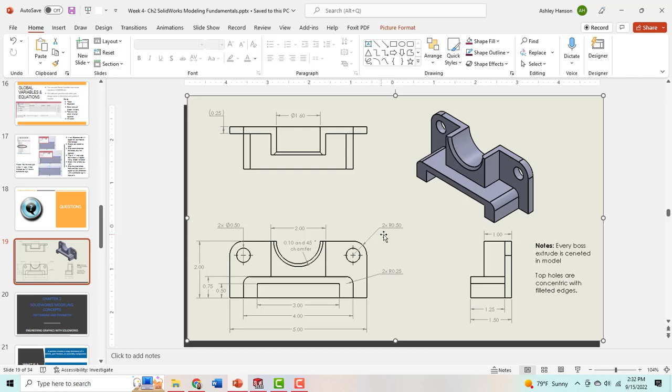Now you can see that our radius is given to us here as 2x, radius of 0.50. That's just showing that because this is a symmetric part, each of those fillets on both sides are going to have the same radius. Same with the diameter listed over here - it's just a little shorthand.

So let's get started by creating a new part file. Now this part is going to be built in inches. So the first thing we want to do is double check that bottom status bar - make sure that we are in inches, so IPS.

And we're going to create our first base feature on the front plane. So we're going to select that front plane, bring it normal to you so we can create that perpendicular sketch.

I'm just going to start with the back base feature, so it's just a basic rectangle. Make sure that when you select that rectangle icon, your first point that you're going to sketch down is attached to your origin. So click your origin and bring your rectangle out. This is giving us that attachment in space, so we are referencing our coordinate system. You can see by that lower triad down at the bottom left corner.

I'm going to use my Smart Dimension icon and dimension this bottom line segment first. The width here is 5 inches. My height is given to me in that front view as 2 inches. Now that this sketch is fully defined, I can add the feature. Make sure that your sketches are always all black and fully defined before you add in any features.

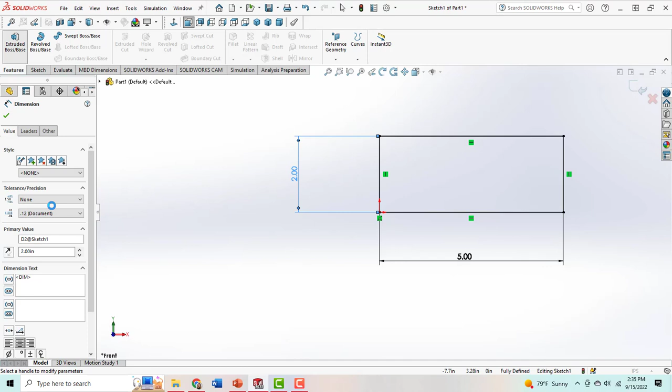So I'm going to select my Features tab, come up to my Extruded Boss/Base feature. And my depth here, because I don't care which direction we're extruding along the z-axis, since I have no other material in front or behind this model, I'm just going to leave that direction 1 as blind, and the depth is going to be 0.25. And then hit that green check mark or enter.

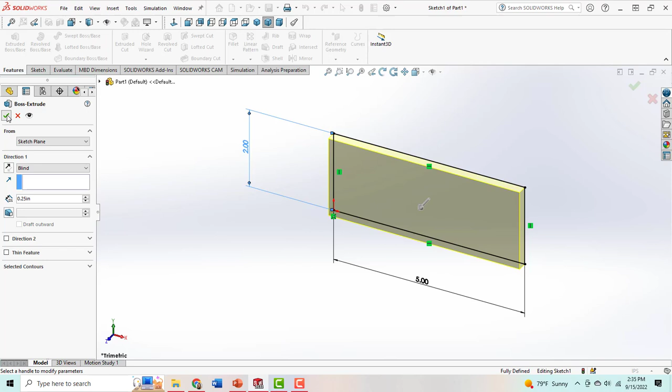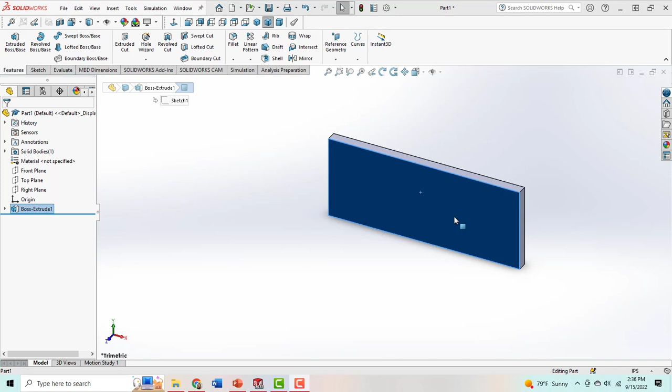Now, instead of adding in a new plane, I am just going to sketch directly on the face of this part because it is already referenced with that front plane from its original sketch. So I'm going to select the front face of this part, bring it normal to me, come up and select my Sketch tab, and again I'm going to do another rectangle.

I'm going to start with the bottom extrude. I want to make sure my first point that I click down is connected to this bottom edge of this base feature. This is just going to save me time at adding in relationships. Once you place down your rectangle, hit your Smart Dimension tool again. This bottom length is given to us as 4. The height is given to us as 0.75.

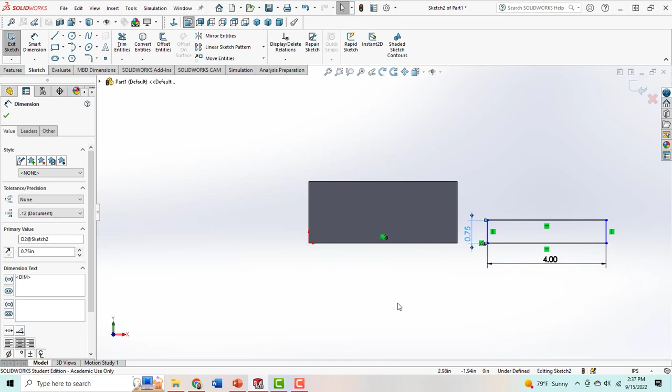Now, you can see that this sketch is not fully defined. I can't make it change size, but I can slide it on and off of my first base feature. This is because I need to give it that placement, and that is where we're going to add in a relationship.

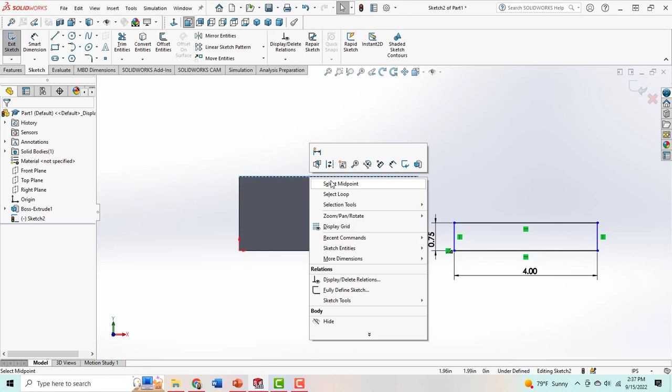So for this step, it's easier if we slide our new sketch off of our base feature, just so we can find our midpoints a little easier. To do this, you can select either the top or the bottom edge of this model, right click, and hit that select midpoint.

Then hold your control key down and hover your mouse over the top edge of your new sketch until you see that midpoint, and you'll see that little icon as a blue circle with a line through it showing you've hit the midpoint, and click it down. Now double check that your selected entities, there are only 2 points selected. If you have a line here because it selected that edge and the midpoint, just click on that line and

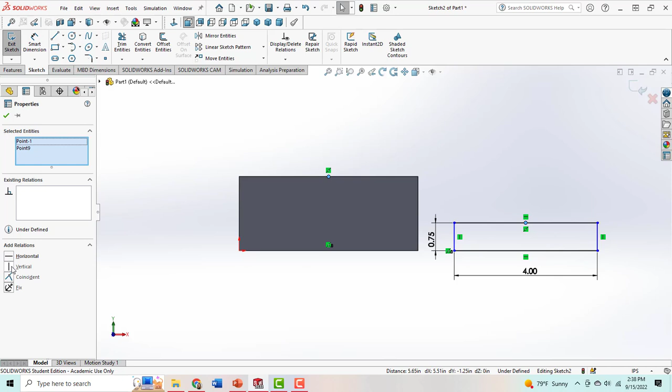hit delete. We only want the 2 points selected, and we're going to add in a vertical relationship because the note for the sketch said everything was centered. So that is just allowing us to center that part. You can see adding in that vertical relationship has now fully defined my second sketch.

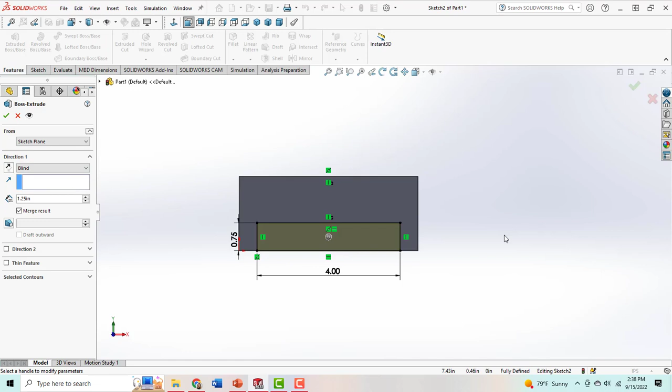So now I'm going to go to my Features tab, go to that extruded boss/base icon again, and the depth for this rectangular feature is 1.25. Now, I do care about the direction since I do want it coming forward in the positive Z axis. So I can hold the roller of my mouse down and rotate my part just to double check that I am coming out at the right direction. And hit OK.

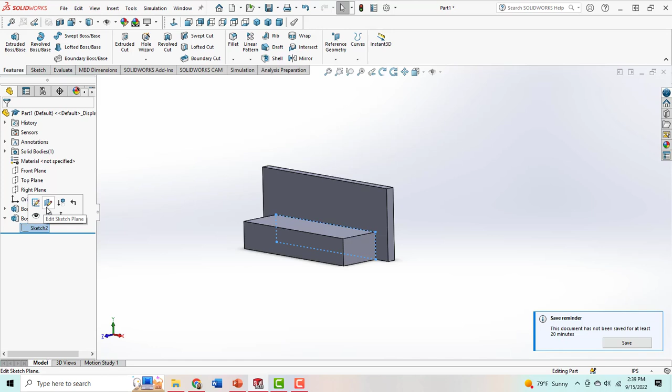Now, remember, you can hit these flyout arrows for these extrudes and edit the sketch at any time. So if for some reason I accidentally sketched on the back face, you can either reverse your extrude or change the sketch plane. By doing that, you just click on your sketch. Instead of Edit Sketch like we're used to seeing, you select Edit Sketch Plane. Here, you can now click that front face again or any plane you want and change where that sketch is located. I'm just going to leave it since it's coming out in the right direction.

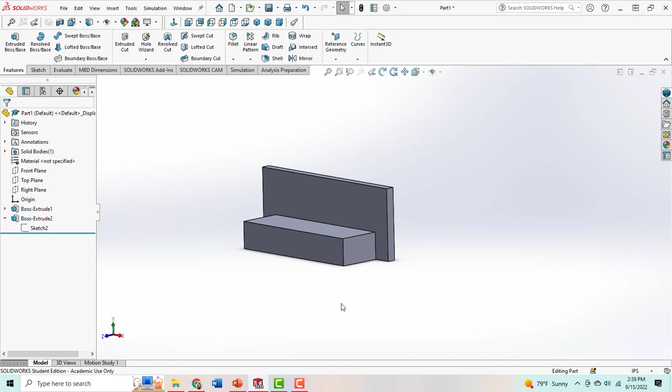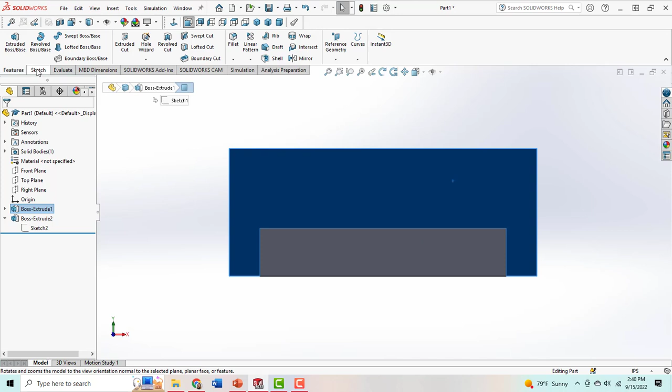So I'm going to create my third boss extrude before I go and create any cuts. So once again, I want to select that front face because that's where I am going to create the first sketch for my third boss extrude. Remember, you can select the face or a plane before you create your sketch. Bring it normal to you. Then go to your Sketch tab. Go ahead and open up that rectangle sketch again.

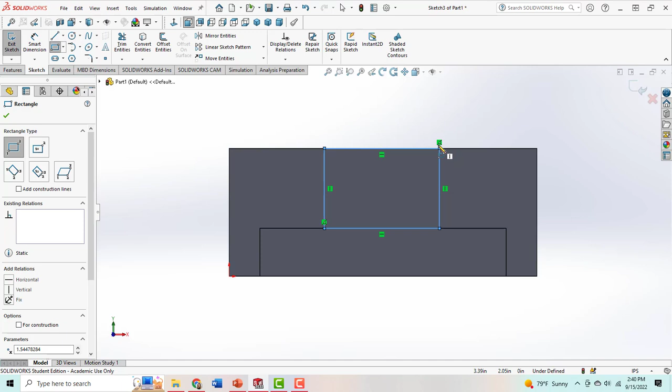Now, to save myself time, I want to make sure that I am connected to my second boss feature. So my first point down is going to be on that top edge of that second extrude. And then I'm just going to bring it up to the top edge of my base feature, that first extrude, to place it down. You can see as I did that this automatic relationship of coincident popped up on that top edge, meaning I'm connected to the top edge, as well as the bottom edge. This just allows me to not have to put in those relationships.

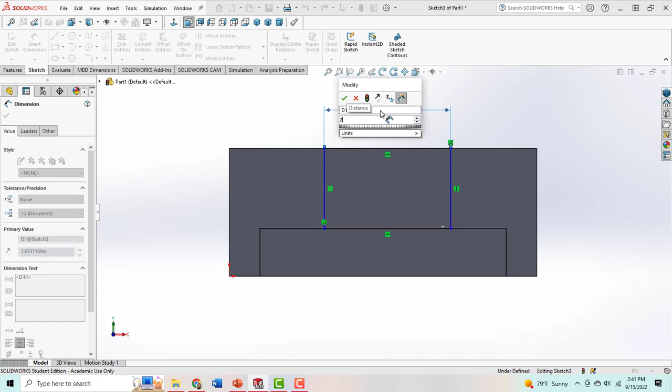It also allows me to not have to dimension the height because it's called out. Our height can only be between these 2 points. Without a dimension, it can get wider, but it can never get taller. I'm going to go up to my Smart Dimension icon, and I'm going to dimension that width. This is given to us at 2 inches. And then I'm going to hit OK. And just like before, I'm going to slide that sketch off of my model.

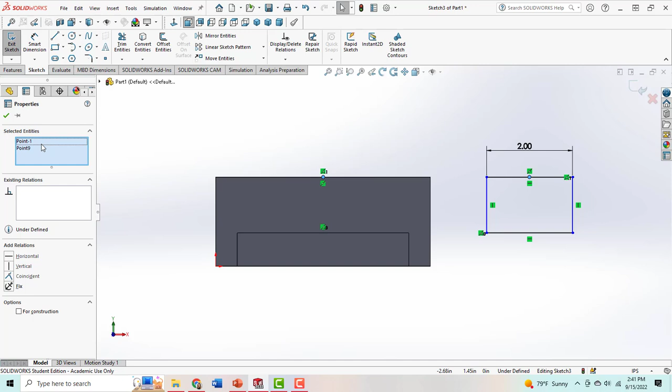I'm going to right click on this top edge, hit Select Midpoint, hold my control key down, hover my mouse on the top edge of my new sketch until I hit that midpoint, select it. As you can see, the line and both points selected on this move. So I'm just going to select line 3 and hit delete. Make sure you only have the 2 points listed. And I'm going to add in that vertical relationship again, and then hit OK. Double check that your sketch is now fully defined again before you add in a feature.

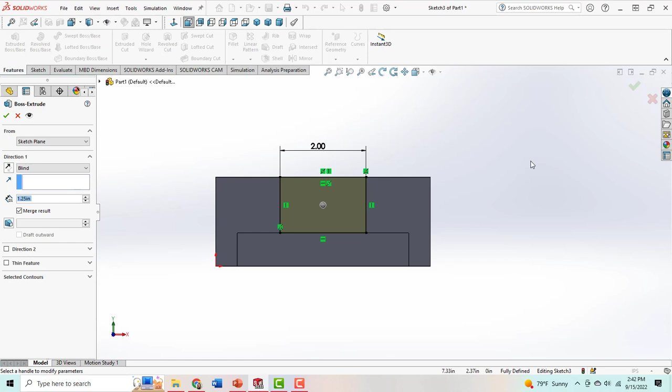I'm going to go up to my toolbar, my Features tab, and select that extruded boss/base again. I am going to hold the roller of my mouse down and rotate it so I can make sure that depth is going in the correct direction. And the depth for this top extrude is 0.75.

Another thing to pay attention to is when you're building all three of these extrudes, make sure that you have the merge result selected. That just allows this to look like one piece. If it's not selected, you're going to see a double line where that sketch is meeting the face of that feature. This will cause a lot of issues when we go to create technical drawings. Hit OK.

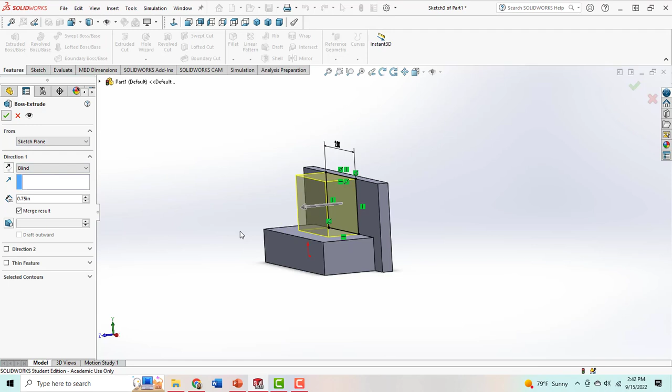And now you can see on the Feature Tree Manager, I have 3 boss extrudes. So remember, each feature has to have its own sketch. So now I'm going to create my first cut, and it's going to be this bottom rectangle that's going to be cut. So I'm going to just sketch right on that face.

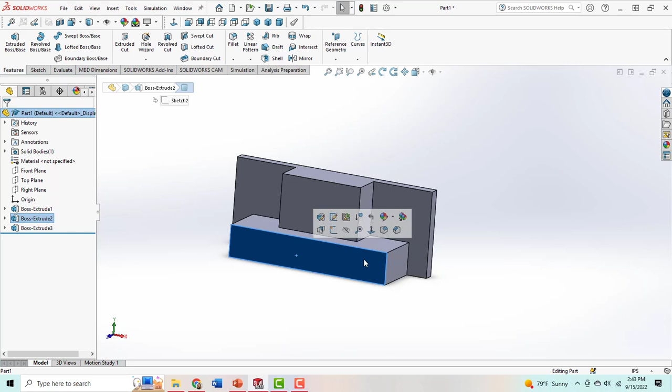So select that front face of our second extrude, bring it normal to you, go to your Sketch tab, select the rectangle icon again, and like before, make sure you're connected with your first point of reference to that bottom edge to save yourself time. That coincident relationship pops up.

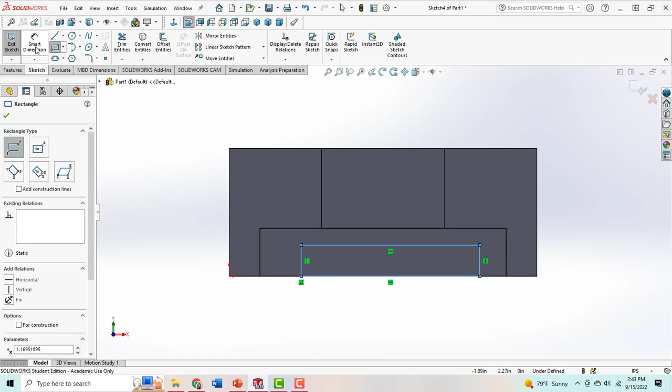I'm then going to come up here and select my Smart Dimension icon. I'm going to Smart Dimension the length first, and it is 3 inches. And then I'm going to Smart Dimension my height, and it is 0.50, so ½ an inch. I'm going to slide my sketch over,

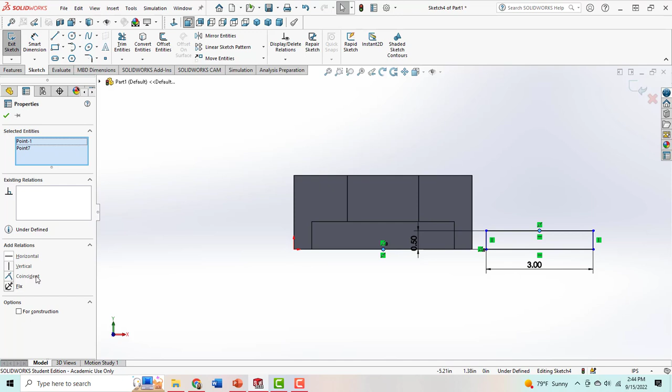and you can select the top or the bottom edge. I'm going to select the bottom edge this time, right click, hit that select midpoint, hold my control key down, hover my mouse over my new sketch, select that midpoint as well, double check that I only have the 2 points listed in my entities, and add in that vertical relationship, and then hit OK. So now that sketch is fully defined.

This time I want you to go to your Features toolbar and go all the way over to the Extruded Cut. We want to cut away the material here. Hold the roller of your mouse down and double check that we are cutting into that part. If we change the direction and we're cutting out, nothing's going to happen because there's no material to cut away from. So you can change the direction by these arrows on the side under Direction 1, and it's going to reverse that. You want to be cutting into your part.

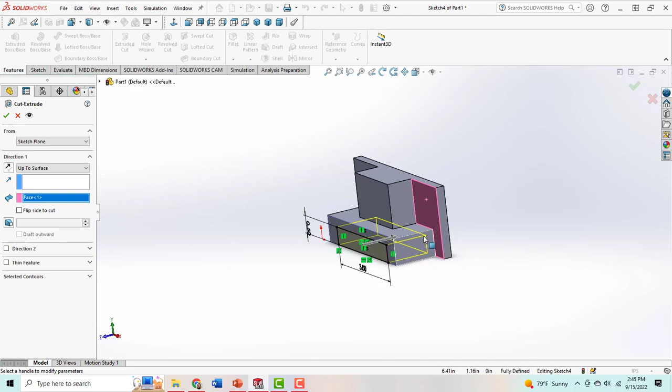However, because we want to control the depth of this cut, I'm going to change the Direction 1 from blind to up to surface. Then I'm going to select the front face of my base feature. That is going to allow that cut to go all the way to that front face. So if I rotate my model, you can see that we are not going all the way through our part, just to that front face of our base feature. And then I'm going to hit OK. Now you can see that material has been removed.

Next, I'm going to create that cut here, that is that half of a circle. Because we have no material on the top of this part, it's going to be much easier for me to just sketch a circle, placing my midpoint on this top edge and cutting it through all. If I had material on the top and I only wanted the half circle, then I would have to create either a 3-point arc or a tangent arc, something different, so I had just a semicircle to cut through.

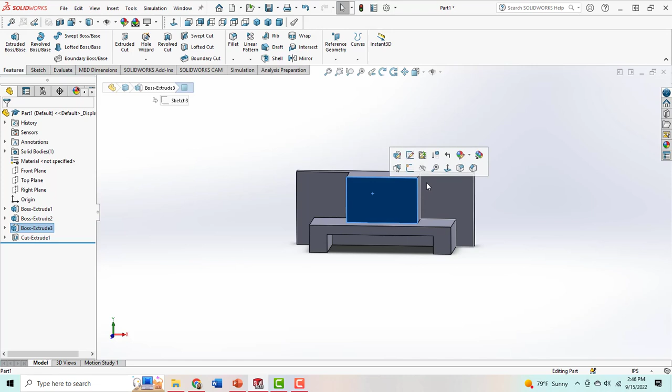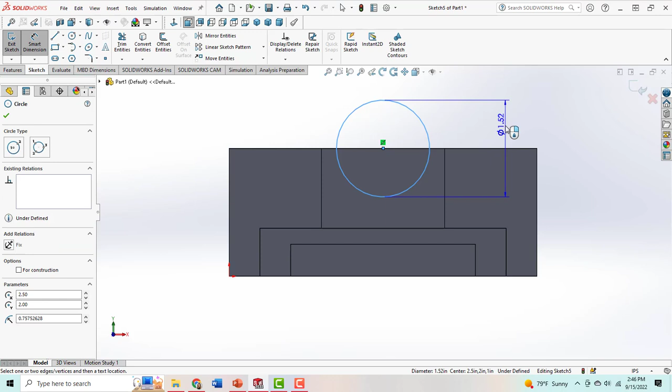So I'm going to select the front face of my third boss extrude, bring it normal to me, go to my Sketch tab, select that circle icon, and I'm going to hover my mouse over until I hit that midpoint, and I'm going to share the midpoint of that rectangle with my circle. So that coincident relationship pops up automatically, saves me time, and it also is going to allow me to use my Smart Dimension tool, select that edge, and give it the diameter of 1.60 and hit OK.

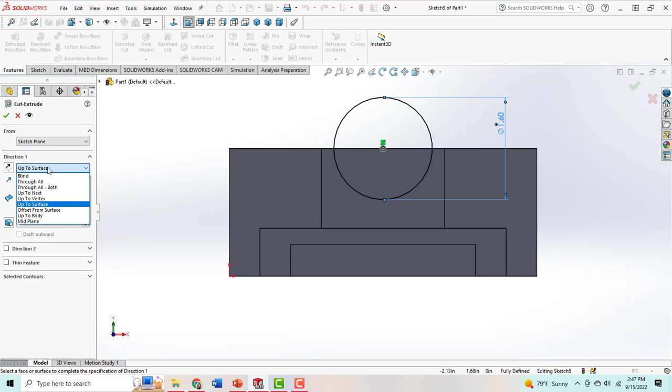Because I have that relationship in place and the circle is attached to that top edge and centered, I do not have to give this sketch my 2 placement dimensions that I normally would, just its overall size dimension, so it saves time. I'm then going to go over to the Features tab, go over to that Extruded Cut icon again, and I'm going to work from the top down where my Direction 1 is going to change to through all, and then hit OK. You can now see that that top circle has been cut away.

So next I'm going to create my fillets, because I know that I can't place my circles for that sketch unless the fillets are already created. So under your Features tab, because a fillet is an operational feature and you do not have to have a two-dimensional sketch for it, I'm going to select that fillet icon.

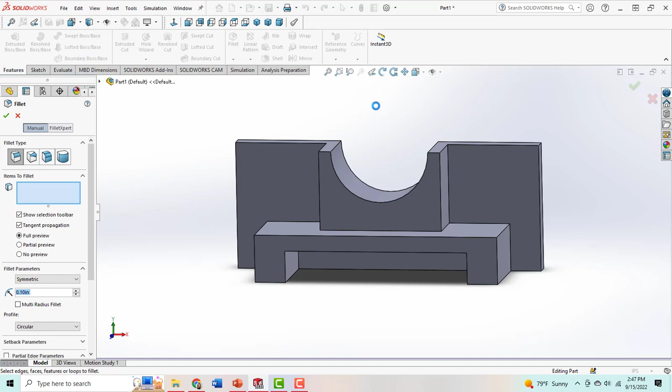Now, this is going to be applied directly to our model. So all we have to do is select the edges we want filleted. This has to be done in 2 steps because our top 2 edges are larger than these bottom 2 edges. But all your fillets that are the same size can be done in 1 step.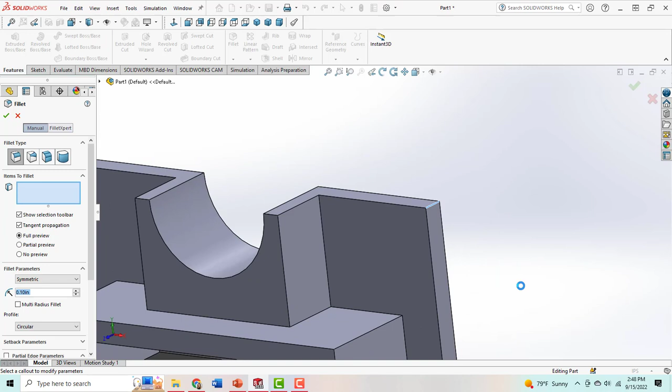So I'm just going to use the roller on my mouse to zoom in. I'm going to select that top edge, zoom out, hold the roller on my mouse down, zoom back in, select that second edge. If you are not seeing the yellow show up giving you that preview of the cut, go ahead and just click this full preview option.

I'm then going to come down to my fillet parameters and change the size to 0.50. You're now going to see that preview, and I'm going to hit enter, and it's going to be applied. Now we can see that fillet pop up on our feature tree manager, but it does not have that flyout arrow because no sketch was needed.

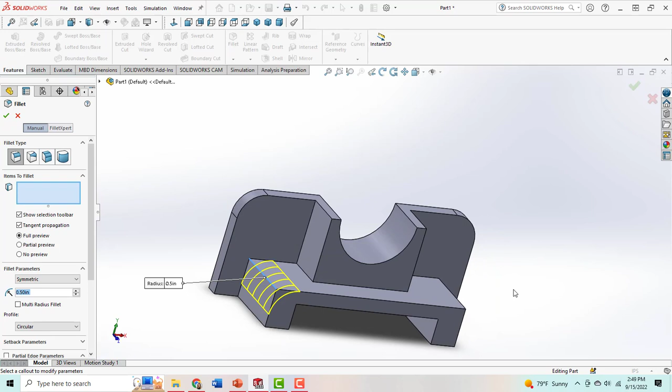I'm going to do the same thing to these bottom 2 edges. So go back to your Features tab, over to your fillet icon, rotate your model, select both of those side edges on our lower boss extrude, and change the radius to 0.25. If you create too large of a fillet, it will not allow you to apply it to your model because it will cut away too much material.

Okay. Now, while we're already working with our fillets, let's go ahead and add in that chamfer. Just like the fillet, a 2D sketch does not need to be created for our chamfer. It is just applied directly to our model. So under your Features tab, go over to that fillet icon, but this time hit that drop down arrow and select your chamfer feature. We are only creating a chamfer on the front lip, so go ahead and select that edge. See the full preview so you can see where it's going to cut.

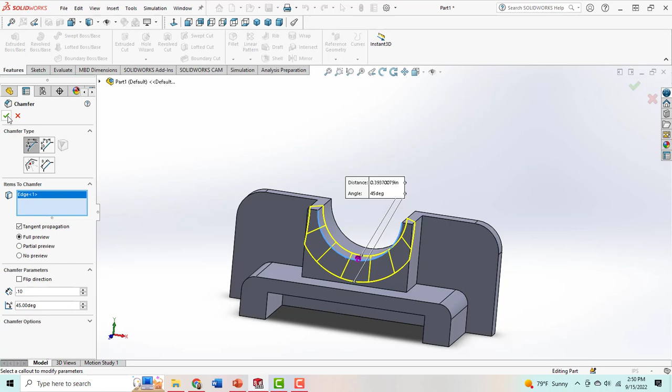Looking at the front view of my drawing, I can see that my dimension here is going to be 0.10, and it is going to be cut at 45 degrees. I'm going to hit OK. You can now see that chamfer beveled edge.

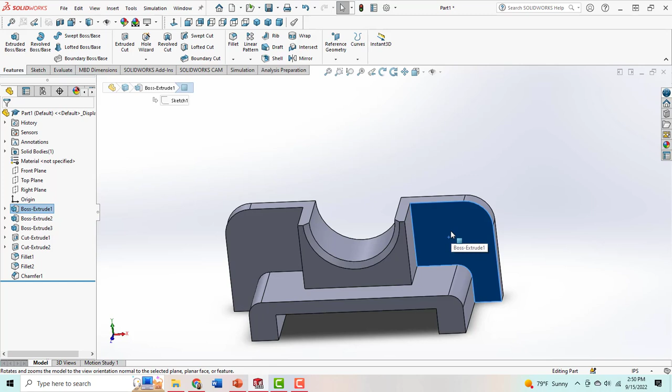So the last thing is we're going to create those 2 side circles. Since I want them applied directly on this face, I'm just going to select that face. You can select either side because it's the same face of our Boss-Extrude1, and bring it normal to me. Then go to your Sketch tab, select your circle icon.

Since both of these circles are the same size and are going to be cut the same depth, they can be done in the same sketch. So I'm going to just sketch both of them. I'm going to select both edges, so hold your Control key down, select both edges, and I'm going to add in an equals relationship. Hit OK.

This is just going to allow me to select my Smart Dimension tool and only have to dimension one of them. So their dimension is 0.50, and then hit OK. You can see both of their sizes have changed.

Now, your drawing does not give placement dimensions. Normally, to make this fully defined, we would need a horizontal dimension and a vertical dimension for its placement. It just gives us the note that this circle is concentric with our top arc. Recall that concentric means they're going to be sharing the same midpoint, so we'll have the same thickness of that material on both sides.

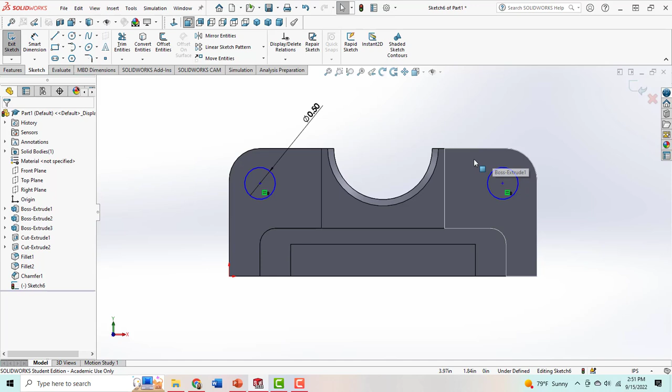So to do that, I'm going to select my circle edge, hold my Control key down, select that top filleted edge, and then I'm going to add in a concentric relationship and hit OK. You can now see that this right side circle is all black and fully defined. So go ahead and do that to the other side.

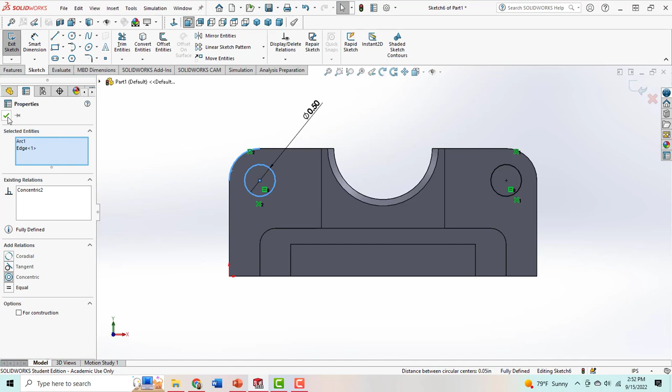Select your filleted edge, hold your Control key down, select the edge of your circle, add in that concentric relationship, and hit OK. Now that my sketches are fully defined, I can go to my features toolbar and go to that extruded cut icon. And because I have no material in the front or the back, I can just have it be cut through all and hit OK.

So there is our finished part.